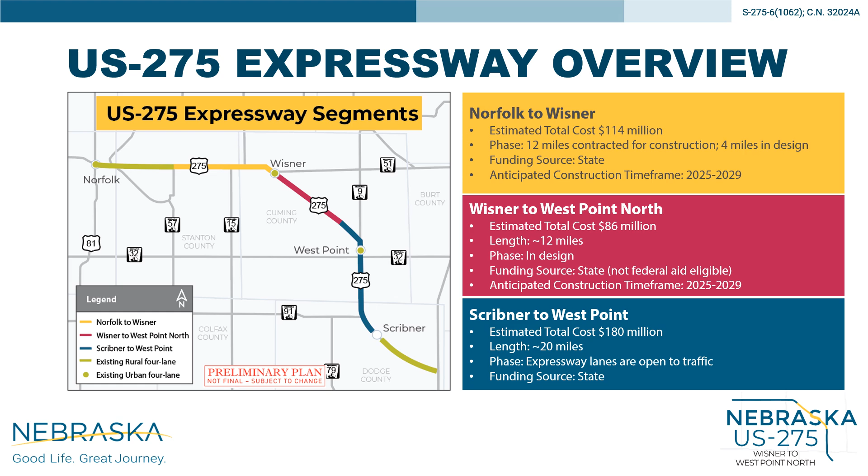The proposed project, identified as Wisner to West Point North, would expand US 275 from a 2-lane expressway to a 4-lane expressway along an approximately 12-mile segment in Cuming County, Nebraska. The proposed project on US 275 would begin at the southeast edge of Wisner at approximately mile marker 102.67 and continue to approximately mile marker 114.02 northwest of West Point, where it would connect to the existing 4-lane highway. The existing 4-lane roadway in Beemer would be overlaid.

The purpose of the proposed project is to fulfill legislative intent to develop the expressway system identified in the 1988 Nebraska Highway Needs Study, provide a safer, more efficient roadway that improves regional connectivity on US 275 for the traveling public, including commercial traffic, in northeast Nebraska to complete the Norfolk to Fremont Expressway, and maximize use of existing transportation infrastructure and existing right-of-way, improve the condition of the existing infrastructure, and maximize the cost-effectiveness of the project.

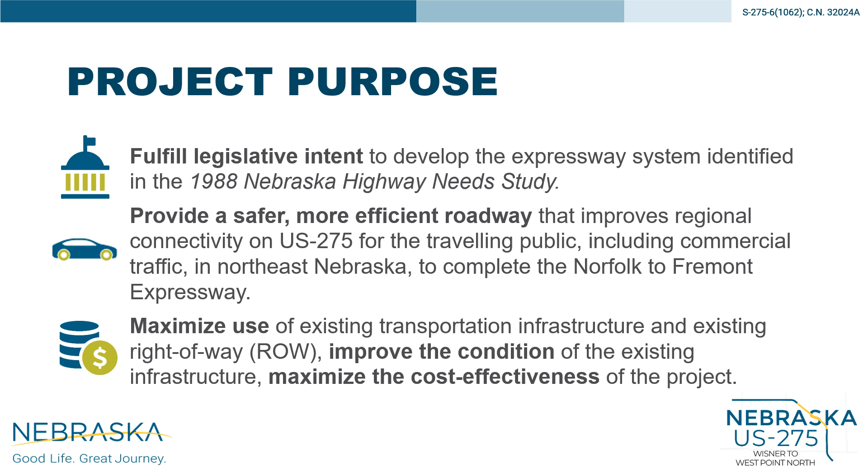The proposed improvements on this project consist of expanding the existing 2-lane highway to a 4-lane expressway by constructing a new parallel 2-lane roadway on one side of the existing highway. Grading would occur along the entire project. Resurfacing, repairing, and rehabilitating the existing lanes as needed, including an overlay in Beemer.

Improving US 275 intersections with Nebraska Link 20A and various county roads, including adding left turn lanes at county road intersections with US 275. Drainage structures would be extended, repaired, or replaced as needed. The project would be constructed under traffic with lane closures controlled by appropriate traffic control devices and practices.

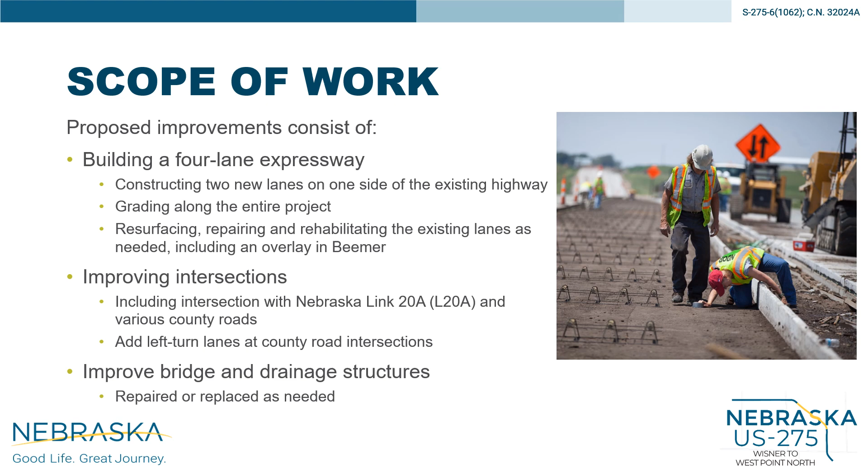NDOT would use the 2+2 approach to maintain traffic, which allows us to construct the improvements without a detour and minimizes traffic disruption. Here's how 2+2 works. While the new lanes are being built on one side, traffic is maintained on the existing lanes. Once the new lanes are completed, both directions of traffic are shifted onto the new lanes while the existing roadway and bridges are repaired and resurfaced.

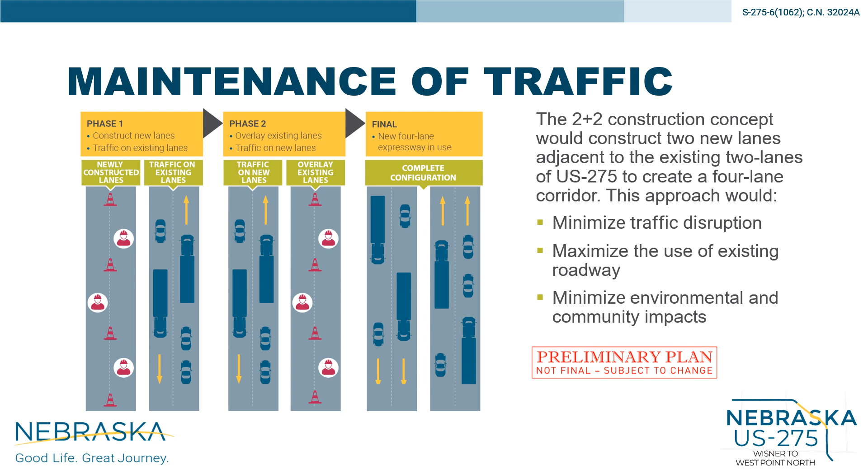Once the repairs to the existing roadway are complete, the new expressway segment would be open to 2 lanes of traffic in each direction. This approach would minimize traffic disruption, maximize the use of existing roadway, and minimize environmental and community impacts. A highway detour would not be required. Work on county roads would be phased so that 2 adjacent county roads are not under construction at the same time. Access to adjacent properties would be maintained during construction, but may be limited at times due to phasing requirements.

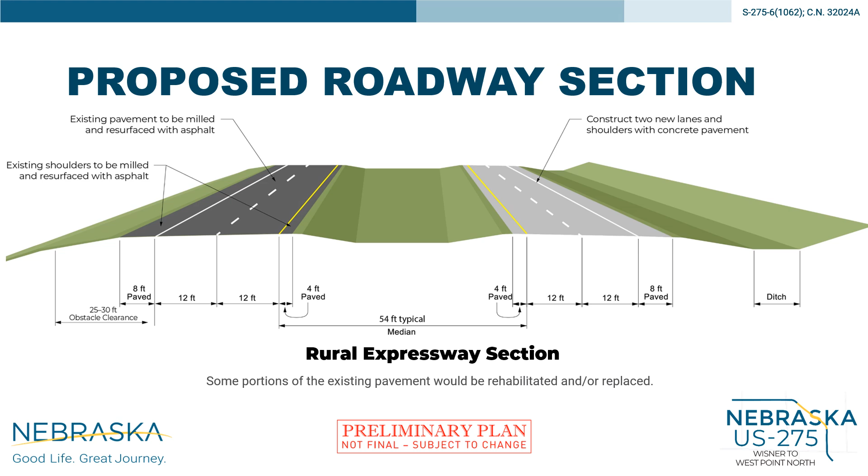This slide shows a typical section for the proposed project. The new roadway would be constructed either north or south of the existing roadway. There would be 2 12-foot wide lanes with an 8-foot wide paved shoulder on the outside and 4-foot wide paved shoulder on the inside. NDOT would resurface and reuse the existing roadway to preserve the existing asset, save costs, and reduce the time to complete the project. For most of the project, the median would be approximately 54 feet wide, as shown here.

NDOT would construct a narrower median in the urban areas east of Wisner and on both sides of Beemer. This slide shows the 20-foot raised turf median that would be used to transition from the 54-foot median in rural areas to the existing 4 lanes in the towns. This will help cue drivers to slow down as they approach both communities.

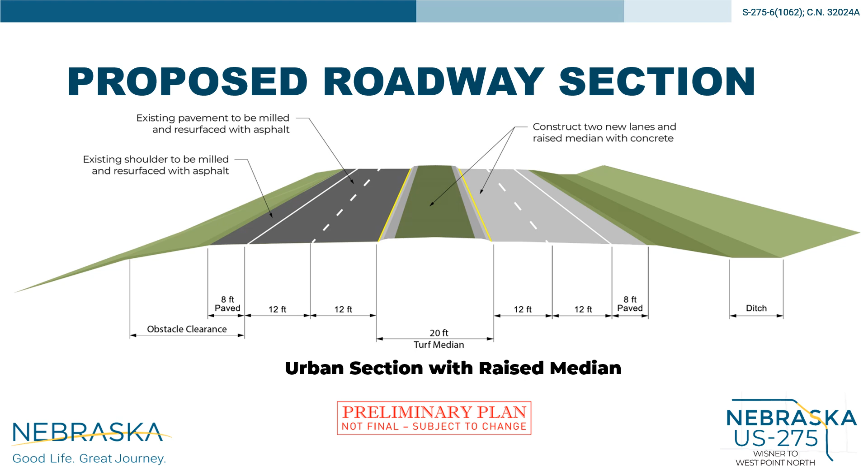NDOT would construct a 14-foot two-way left turn lane closer to Wisner where there are more existing driveways. This would help maintain full access. Similar to the rural expressway sections, NDOT would preserve the existing assets by overlaying as much pavement as practical.

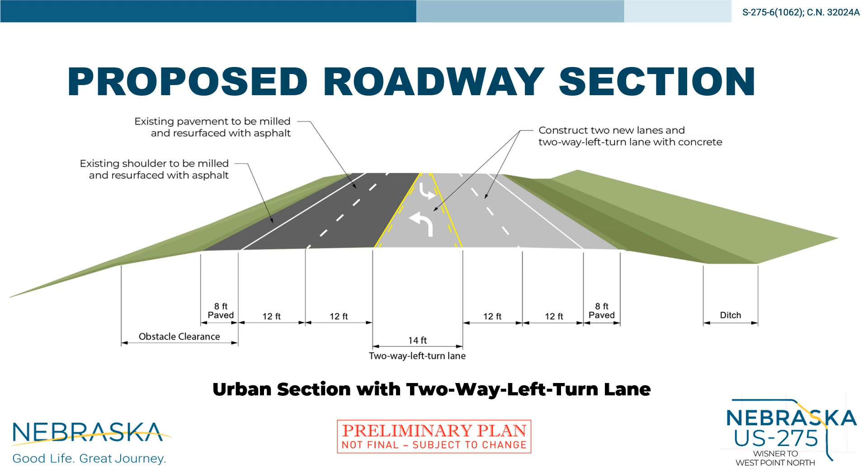A U.S. Army Corps of Engineers permit would be required. The Corps process requires NDOT to evaluate more than one alternative, compare the impacts of those alternatives, select the alternative with the least environmental impact, and then mitigate wetland and stream impacts. NDOT's alternative evaluation resulted in the comparison of 3 alternatives, the no-build alternative and 2 build alternatives.

The first alternative is widen north, and new lanes would be constructed to the north of existing lanes. The second alternative is widen south, and new lanes would be constructed to the south of the existing lanes. Construction would begin on the south end of the project, north of West Point, to connect to the recently constructed new lanes. NDOT developed study corridors to compare impacts of these 2 alternatives.

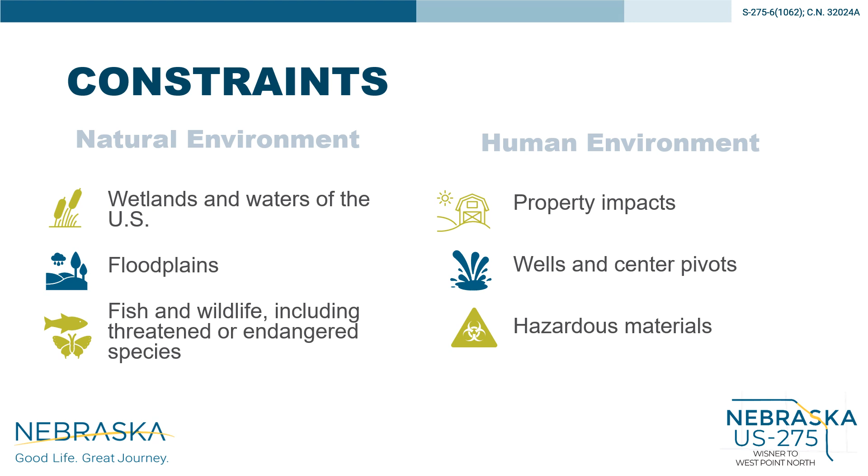NDOT will be evaluating the impact of the alternatives on both the natural and human environment. Natural environment constraints include wetlands and waters of the U.S., floodplains, and fish and wildlife, including threatened and endangered species. Human environmental constraints include property impacts, including acquisition of right-of-way and impacts on houses and other buildings, historical properties, including archaeological sites, wells, and center pivots and hazardous materials.

The widen south alternative was selected as our preliminary preferred alternative because it has fewer wetland, floodplain, property, and well impacts. Additionally, it has fewer hazardous material sites and no impact on feedlot sewage lagoons.

At the west end, the new lanes transition from a 4-lane urban section to a 4-lane undivided section at approximately Q Road. Over this transition, the new lanes begin on the north side of existing roadway to avoid business impacts and transition to the south side by P Road. On the east side, the new lanes transition to the north side of the existing road to connect to the previously constructed lanes.

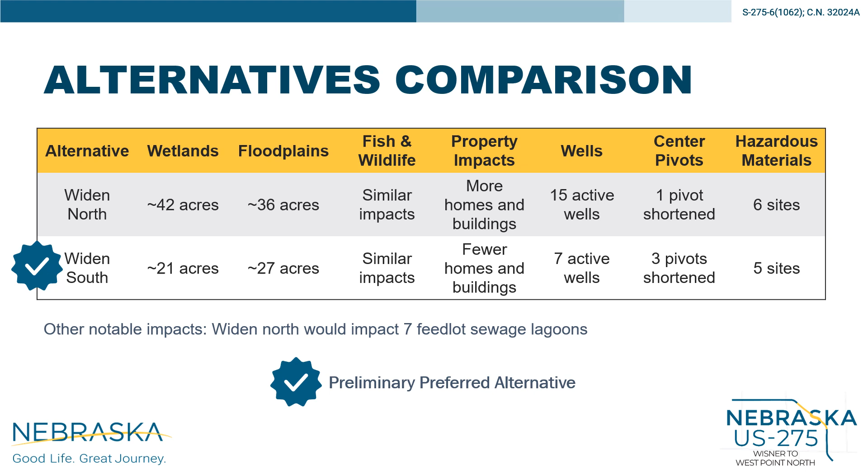The proposed project would require the acquisition of additional property rights, which could include new right-of-way, control of access, permanent easements, temporary easements, commercial and residential relocations, and/or impacts to center pivot irrigation systems. If your property is impacted by this project, you'll be contacted by a representative once the design footprint has been established. Access to adjacent properties would be maintained during construction, but may be limited at times due to traffic phasing requirements.

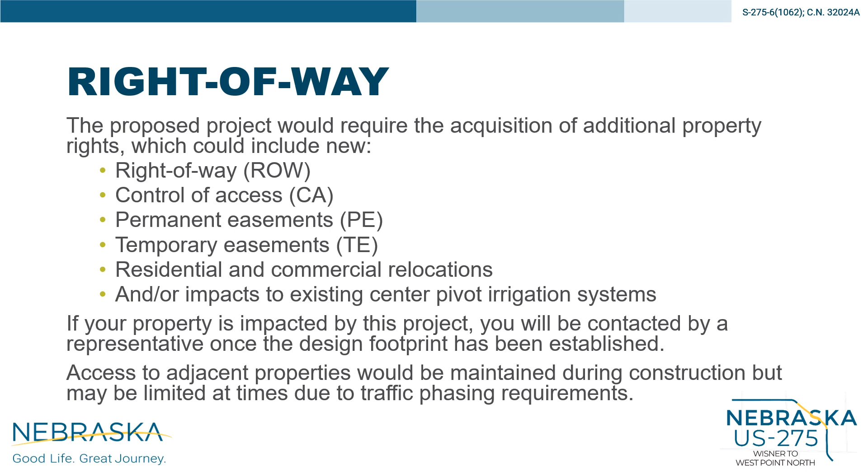Let's take a look at the project schedule. The preliminary design phase began in early 2024, followed by stakeholder meetings in the fall of 2024 and again in early 2025. At this public meeting, we're sharing the design and gathering public feedback.

Information regarding the proposed project will be available at www.ndot.info/32024A. Comments will be collected through February 5, 2025 and can be submitted on the project website, at NDOT headquarters, or to Sarah Fisher or Kevin Damagala.